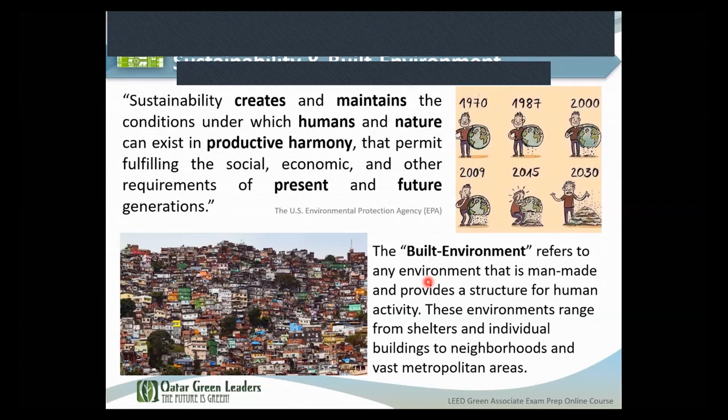The built environment is one of the components of human activities, because as humans we need shelters, offices, entertainment areas, and so on. So whatever we do to practice our human activities, we call it the built environment in general, which includes different types of buildings and facilities. Usually when we talk about sustainability, we talk about built environment in order to be clear.

So what is sustainability? According to the UN definition, coined in 1987 as part of the World Commission on Environment and Development, it is defined as meeting the needs of the present without compromising the ability of future generations to meet their own needs. This is trying to say let us be careful with our resources, let us do our human activities and businesses in a way that is optimized and efficient, and that will allow future generations to have some of these resources. We cannot just continue to deplete resources without considering the generations to come.

Also, the UN Environmental Program defined sustainability in 1991 as improving the quality of human life while living within the carrying capacity of supporting ecosystems. Our ecosystem as humans is considered the planet Earth and its atmosphere. So we need to improve our quality of life through economic or human activities, but we need to take care, because we have limited resources on the planet and need to be more efficient in using them.

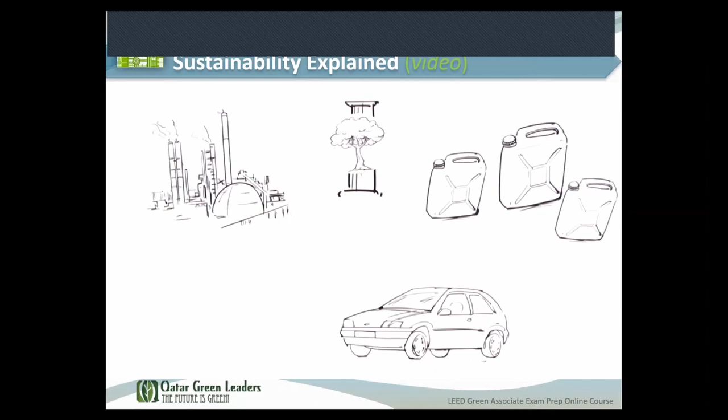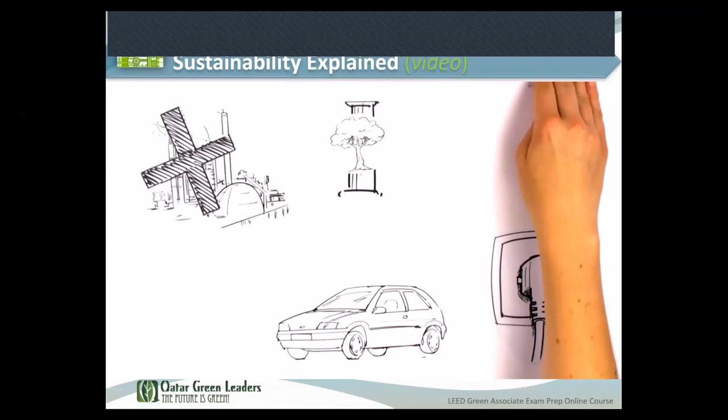We must use natural resources more sparingly too. One of them is petrol, which we need for our cars. But sooner or later this resource will be exhausted, so there'll be no fuel for the cars. This is why we're looking very hard for an environmentally friendly alternative, so that future generations will have environmentally friendly cars. Electric ones, for example.

The next pillar is the economy, that is, business and industry. In future, at the supermarket, Peter should only find produce that's in season in his region, like strawberries in summer. Mangoes from Brazil or bananas from Colombia and Ecuador arrive by air from a very long way away. Transporting them causes a lot of pollution.

The third pillar of sustainability is the social element. Goals here include, for example, better education and training opportunities, equal rights for men and women, fighting poverty, and prosperity for the whole of humanity.

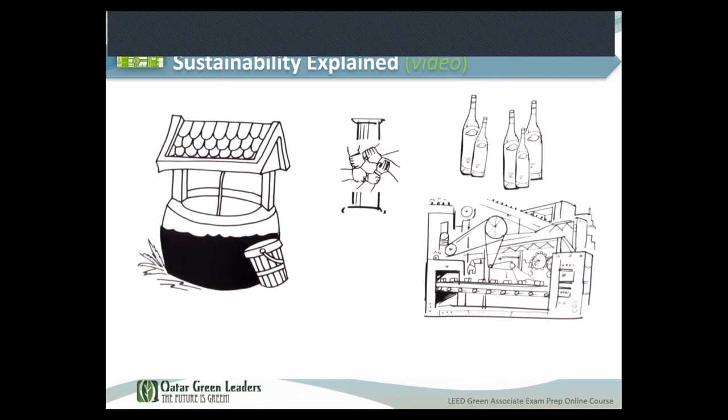One beverage manufacturer from an industrialized country has quite a bit of catching up to do here. It repeatedly takes over the wells of villages in India because it needs the water to make its products there. That isn't very sustainable. Peter doesn't think so either. After all, at least a little water should be left in the wells for the Indian population.

So Peter tries to do justice to the three-pillar model. When he buys organically grown produce, when he goes to work on his bike, and by using green power from wind turbines, he really does live sustainably.

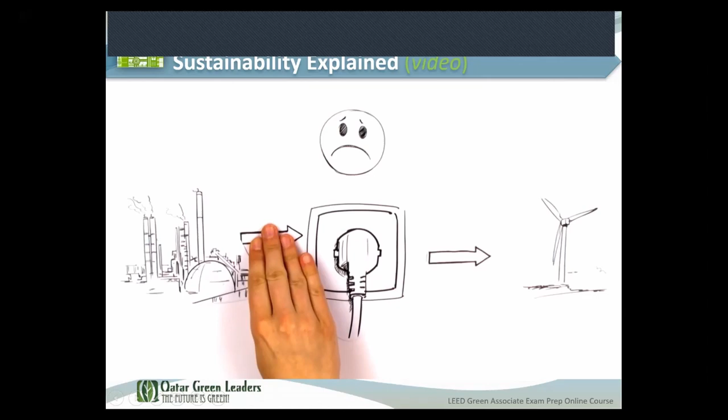But be careful. A lot of companies exploit consumers' environmental awareness. Not all the products that claim to be from fair trade or organic farming are sustainable. It's up to consumers to be well informed about the products they're consuming.

So as you have seen, sustainability can be applied to different facets of life and to different human activities, like, for example, sustainable construction, sustainable industry, sustainable education, sustainable healthcare, sustainable transportation. So it's a very wide term actually.

But what we need to focus on here in this course is sustainability in the built environment, or in short, we call it green building or green construction.

You cannot handle them away from each other. Whatever you do on the social side will impact the economy and will impact the environment at the same time, and vice versa. Like, for example, when you pollute the environment, you are harming society and also impacting the economy of your country.

If you have, for example, a very well managed society, people are healthy and strong, they will help the economy and they will help the environment again. So you cannot separate them from each other. The overlap between these three pillars or concepts will lead you to have sustainability in whatever you are doing, whether it is a project, industry, or any human activity.

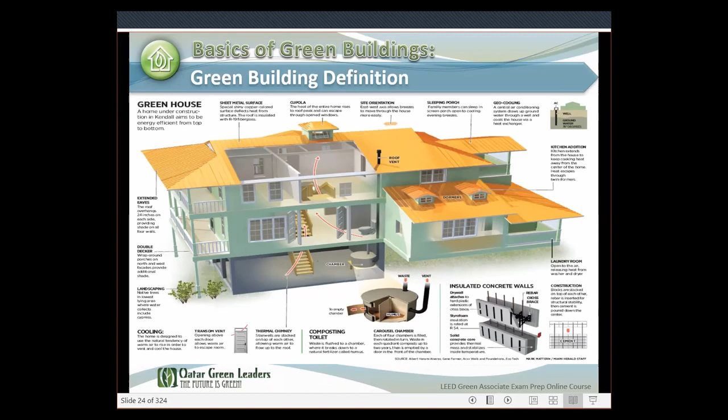Generally, a green building is not about the building itself, but about defining the process, because if you follow the same standard process of buildings, you'll end up with a standard building. But if you need a better product, you have to look into the process itself and try to optimize and adjust it in order to have a better, green building.

So the definition says: it is the integrated effort of transforming the way built environments are designed, constructed, operated, and maintained. Here we cover the whole process from beginning to end, from design until operation and maintenance, encouraging involvement from early planning to beyond the end of a structure's life.

So everybody, all the stakeholders must be engaged in this process in order to guarantee it can achieve its goals, and by result we will get green building or a better building.

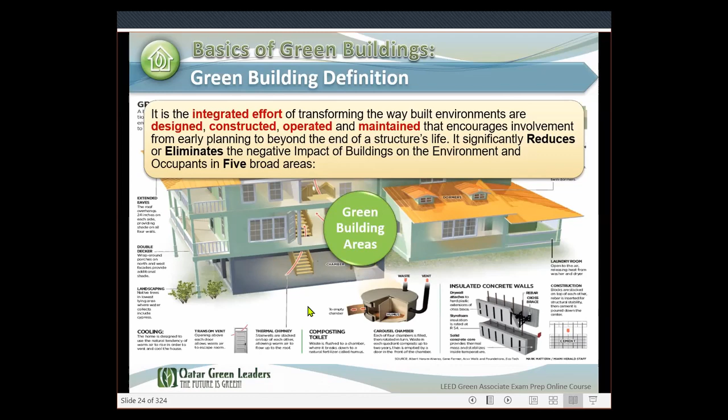The purpose of optimizing the process is to reduce or eliminate the negative impacts of buildings on the environment and the occupants in 5 broad areas. These areas we call them green building areas or green building aspects, which you can find in almost every green building rating system.

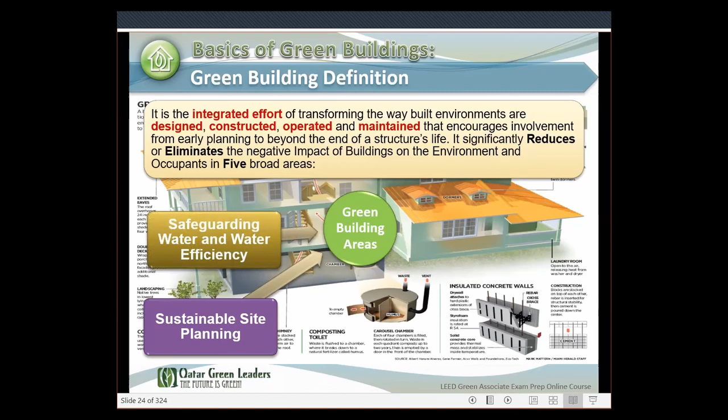These 5 areas include sustainable site planning, safeguarding water and water efficiency, energy efficiency and renewable energy, conservation of materials and resources, and indoor environmental quality.

So if you look into any green building rating system, you will find that these categories or areas or aspects of our built environment are addressed, and this will be converted later in LEED itself into the form of categories. We will have a category called site, energy, water, material, indoor, and the like. So basically, we need to address these areas of the built environment to make sure we cover everything related to green building.

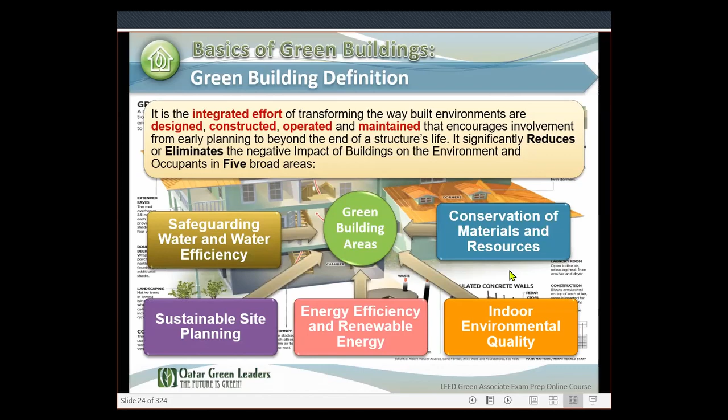Let us now go through some concepts related to green buildings. First concept: green buildings usually are regenerative projects. Regenerative projects are projects that support the health of the local community and regional ecosystem. These projects usually generate energy, and sometimes they can sell the excess to the grid or network.

So you can have, for example, a house or an office building where you generate electricity on your own from renewable sources, and then you suffice your operation. After you have enough electricity, you may have some excess of this energy. You can even sell it to the market or to the grid.

It improves the hydrology system by being more efficient in water consumption and stormwater and rainwater management, for example. Sometimes it produces food, so that's why we can say it is a regenerative project. You may have a house with a backyard or garden where you produce your own food, and you can even sell the excess to the market. It enhances biodiversity, so it has less impact on the environment and ecosystem, and it also provides community network.

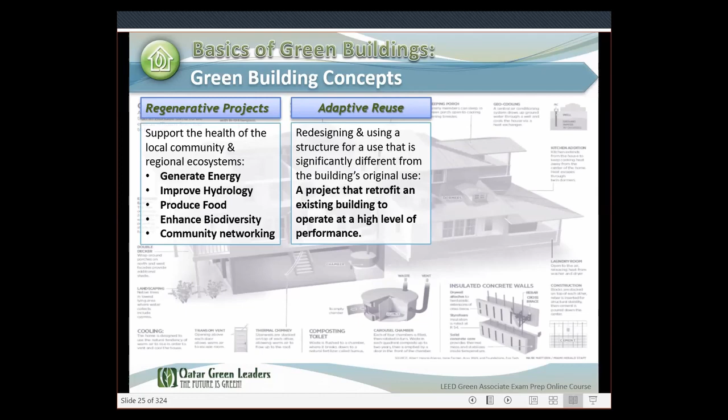Adaptive reuse is another concept of green building, where you redesign and use a structure for a use that is significantly different from the building's original use. So suppose you have an existing building. This building was used as a factory, for example, and then you need to build an office building.

You have 2 options here: whether to seek a new area of land and start building a new office building on it, or to buy this old building if it is not used by anyone else, and just refunction or reutilize this building. You can convert it from a factory into an office building, and this has happened many times in different areas of the world. It is usually even economically viable. You can save money and make better decisions by avoiding developing new land.

Question from Mr. Dawood: is this the concept of Ras Abu Aboud Stadium? Yes, not necessarily Lusail Stadium. Ras Abu Aboud is maybe a clear example of that, but usually when we talk about adaptive reuse, you are using an existing building. In Ras Abu Aboud, there were actually some buildings or facilities existing on site, and they have been included in the master plan of the stadium, so you can consider this adaptive reuse. I am not sure about Lusail Stadium, but I think Lusail doesn't have existing building utilization, maybe. I'm not sure.

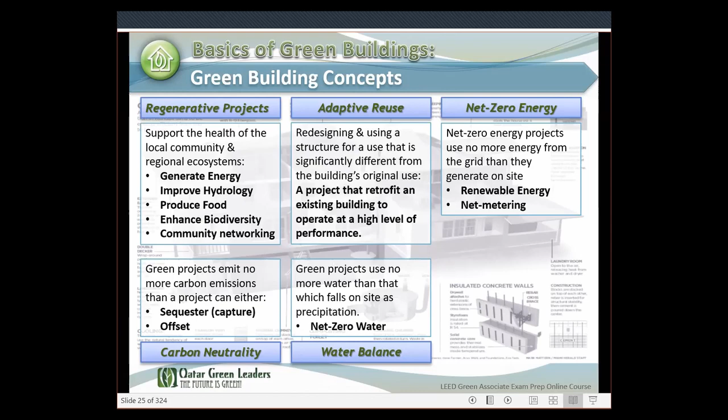Water balance is another concept in green building. Similar to net zero energy, a project is net zero water if it uses no more water than that which falls on site as precipitation. You can also say a green building may be net zero waste, meaning there is no waste at all. The green projects produce zero waste by salvaging, reusing, recycling, or composting all materials used during construction and operation.

These concepts are not mandatory. We need you to understand them because they are relevant to different credits and requirements in LEED and green building in general, but it is not necessary. Not every project will be net zero, and not every project will have zero waste. What we need to understand is that green projects usually perform better in these areas than a standard project when it comes to all of these concepts. Relative to green building is also what we call systems thinking.

Another comment here from Mr. Dawood before we proceed: he's saying net zero is a mandatory requirement in the UK now. I'm not sure about that, but I don't think it is becoming mandatory - it may be some sort of encouragement, encouraging people to become net zero or to approach net zero in generating electricity. He said by 2050 - this is the ultimate goal for most governments. Some people set a goal for 2050, others set different dates, but in general there is a global target of net zero by 2050 in some countries like the UK. Thank you for this comment, Mr. Dawood.

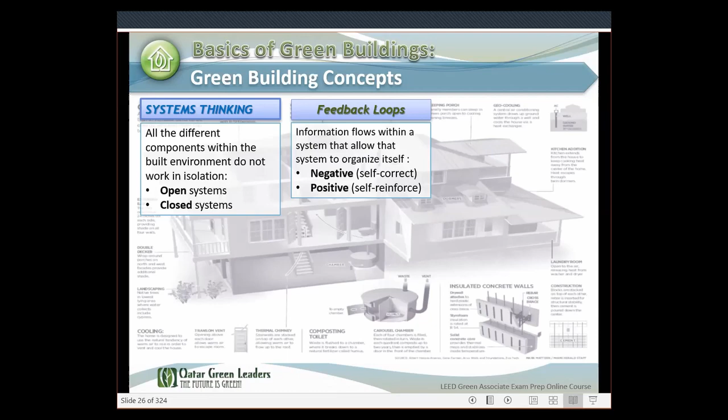That's why we have census surveys done every year, so we know how many people there are, and can make trends or forecasts to see how developments are going. So in general, systems must have feedback loops in order to help them optimize and control. Also, part of feedback loops is having leverage points - places where a small intervention can yield large changes.

For example, if you need to optimize energy consumption in a building, you have two options here. You may change the whole systems of energy inside your building into more efficient buildings, but this might cost you a lot of money.

There is another option, which is to educate your building occupants. This is what we call a leverage point. Instead of taking the hard decision of fixing a problem in the system, we look into some decisions that can help optimize the systems with minimum impact on cost or any other measure.

For example, if you provided information for the building occupants about the real-time energy consumption, and you give some incentives for them to switch off the AC or switch off lighting, you make them aware about the issue, and they will definitely help reduce consumption without any extra investment in the systems itself.

So this is an example of a leverage point that can be used, which is usually referred to as the Prius effect, where people can intervene with the system in order to make it more efficient.

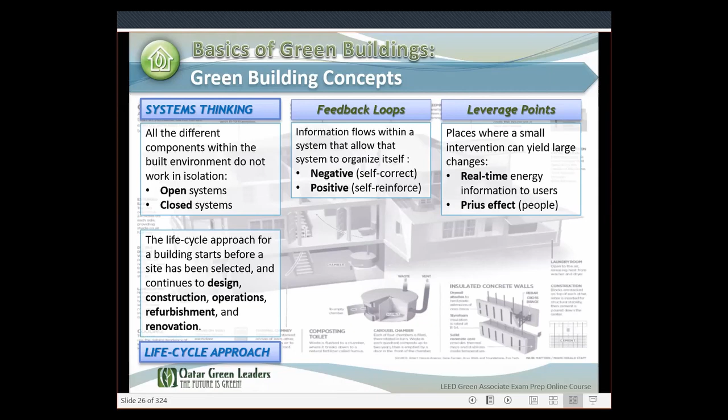You cannot judge any project without having the full picture of its life cycle. This can be handled in a project through two areas or two ideas.

For example, life cycle costing. You can look into the purchase prices, fuel, installation, operation, maintenance, disposal, finance charges, and the replacement cost. All the costs associated with the project can be considered from the day the site was selected until, for example, 10 years or 20 years during operation. This is called the life cycle costing.

The life cycle costing is a principle that will help you realize the benefits of green building. Usually when you invest in a project to optimize its performance, people will tell you green building is costly, it needs more money compared to a standard building. But this is not the whole story, because you are looking only at the initial cost of the project, and initial cost cannot judge the full performance.

You can invest a certain amount of money in the project today in order to enhance its performance, but this amount of money will be paid back to you through operation time. For example, after 5 or 7 years, you will pay back the amount you have invested in the form of cost savings coming from energy, water, waste, or any other performing aspect.

Under the life cycle costing, we consider several types of cost, like hard cost, which is any cost invested in elements of the project, like concrete, steel, flooring, finishes, furniture. All these are considered hard cost.

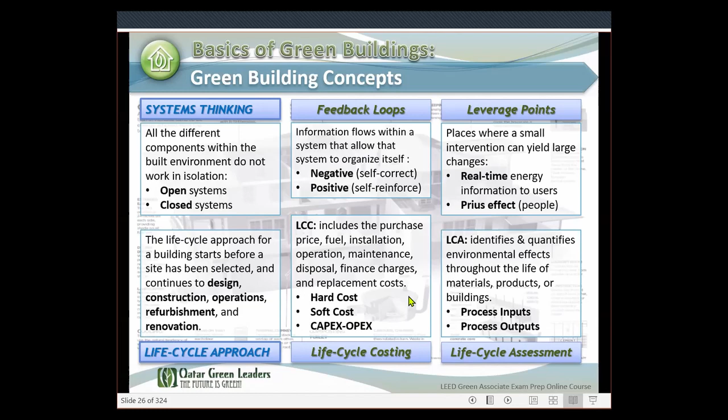To do life cycle assessment, you have to look into the process within a certain range, and you have to define this range - for example, from raw material extraction until selling in the market, or until a number of years during operation. So it depends on the scope of the life cycle assessment. You will determine the time range of the study, and then you can get some inputs from the process, and using certain tools or software, it can help you identify the process outputs, which give an indication of how this product or material is impacting the environment. We will come to these concepts in more detail when we talk about the material category.

So why build green? The business case for green is based on the benefits that can be accrued from building green. There are many benefits, according to the USGBC: energy use reduction from 24% to 50%, reduction in CO2 emissions from 33% to 39%, water use reduction of almost 40%, and solid waste reduction of almost 70%. Green buildings can help reduce several impacts and components of building operation and maintenance, and it is good for the environment. It is part of achieving sustainability goals.

There are also some advantages. If you have a green building, you can utilize it to benefit and gain some advantages compared to traditional buildings. The General Service Administration, or GSA, is the administration in the US responsible for developing, operating, and maintaining governmental buildings. They have a large stock of buildings - some certified as green buildings, some not certified, or traditional buildings.

They conducted a study and published it, and from the conclusion, they found that when comparing green buildings to traditional buildings, green buildings require 13% lower maintenance cost, which helps - if you have more green buildings, you get better budget or economic performance. They also found 26% lower energy usage, due to improved system parameters, and 27% higher building user satisfaction - employees working in these buildings are happier, more productive, and healthier compared to those in traditional buildings. Finally, the carbon footprint of these buildings improved by 33% compared to standard buildings, meaning lower CO2 emissions.

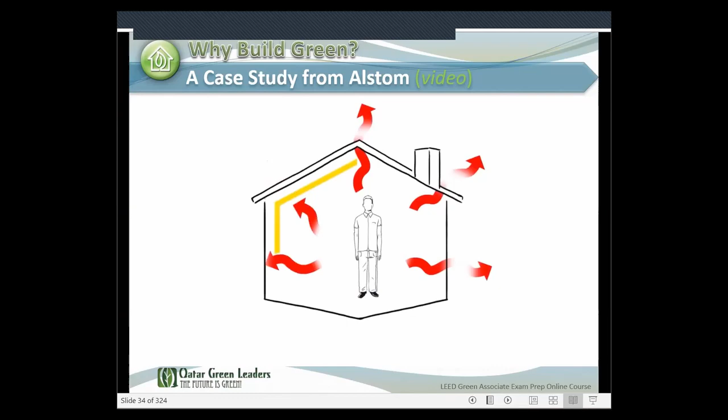We also became aware of how important it is to insulate buildings to avoid wasting energy. This is true of industrial sites too, in terms of pollutant emissions, noise, and uncontrolled energy use. So when we build residential buildings, office buildings, and industrial sites, we need to preserve both the environment and the well-being of their occupants. Since that time, architects have been drawing on the principles of sustainability when they design and construct buildings.

It was in the late 1960s that sustainable building was born. Given these circumstances, how can manufacturers ensure that their facilities worldwide are eco-designed to operate efficiently and effectively? It's a sizable challenge. The goal is to reduce the ecological footprint of industrial buildings, both as they are being built and throughout their lifespan, while ensuring that their occupants have the best possible working conditions.

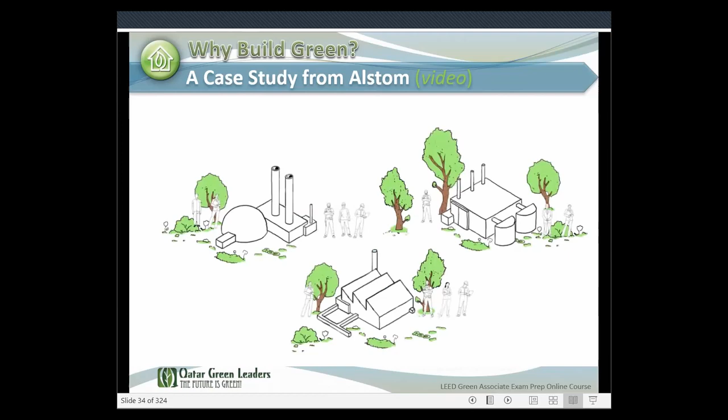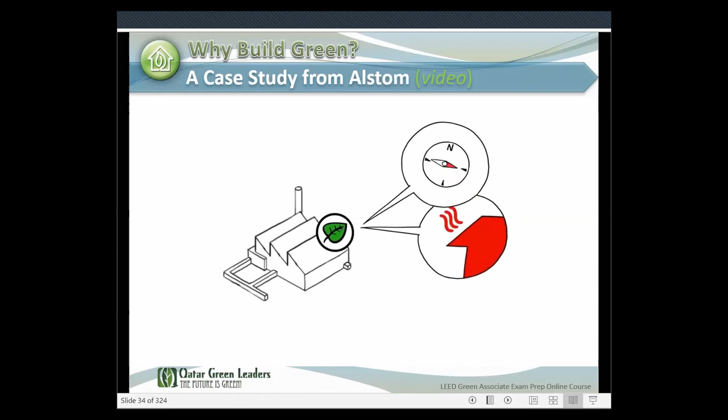To do that, architects consider several sustainable building criteria. A green building is energy efficient thanks to its level of insulation, the direction it faces, its use of renewable energy, its heating and air conditioning systems, and its positive energy balance.

Buildings are also eco-friendly if they reduce water consumption and recycle their wastewater, if they optimize the quality of their sound insulation, and if they are accessible via public transport.

And obviously, green buildings use materials and equipment that are friendly to people and the environment. So they'll make greater use of local suppliers, and they'll include materials such as wood that generate smaller amounts of carbon dioxide as they are produced.

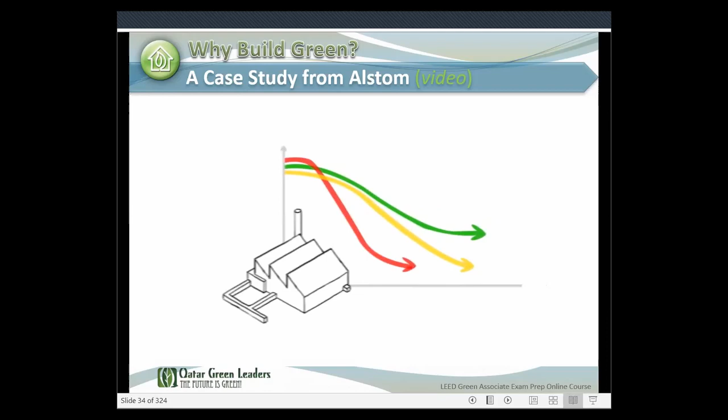There's no doubt that eco-friendly buildings, and industrial sites in particular, require a bigger investment at the outset, but because they consume less energy, the operating, maintenance, and upkeep costs are reduced over time. Since these facilities are more comfortable and more efficient, thanks to improved ergonomics, they allow for better use of the workspace. There are several certification bodies that monitor compliance with these criteria.

LEED certification from the US emphasizes the environmental issues posed by eco-construction, while France's HQE certification is more concerned with the comfort of those using the building, and the UK's BREEAM considers both these criteria equally.

By constructing eco-friendly buildings, companies play a major role in promoting sustainable development within the economy. With Alstom, commitment to green construction can be seen in the eco-friendly buildings the group continues to design, several of which have obtained one or more of these certifications, and in the steps it's taking to evaluate the performance of its existing sites. In addition, the group's new sites are all eco-friendly, and several are even pilot sites.

Every new group site needs to address two major issues. How can we comply more closely with international standards? How can we create a more standardized building process worldwide?

For instance, take the new Chattanooga plant that opened in the United States in June 2010. It won gold certification under the LEED program for building energy efficiency because energy consumption was reduced by 35%. Today, skylights provide 75% of the lighting in the site's occupied areas.

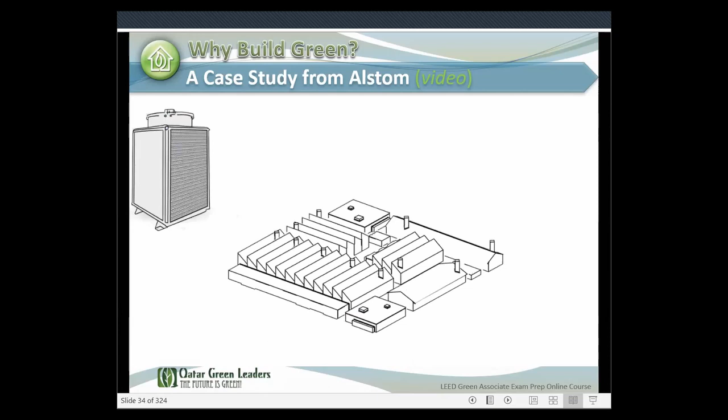They have the very latest electrical devices for monitoring energy-intensive equipment, such as dimmers and motion detectors, to reduce the use of lighting. Thanks to high-efficiency heat pumps and a double-flow CMV system, the site captures 80% of the heat it generates.

Photovoltaic panels with annual capacity of nearly 800 megawatt hours have also been installed at the site, enough to provide electricity to 100 homes. And there's a special parking area designed to encourage car sharing among employees.

As a result, the site has cut its energy costs by 25% and its consumption of natural gas by 60%, while employees enjoy more efficient and more pleasant working conditions.

Alstom is already operating several sustainably built plants, and their number is growing. They include Camaçari in Brazil, Newcastle, Amarillo, and Charleroi in the United States, Wuhan, Tianjin and Shanghai in China, Chennai in India, and Ufa in Russia, plus in France the plants in Massy, Belfort, Saint-Ouen, and soon Villeurbanne and Montpellier.

Around the world, these changes are helping Alstom improve employee working conditions and make each site more environmentally efficient and more productive. With Alstom, eco-construction is making sustainable development a key factor in keeping the group competitive.

So as you have seen, this is just summarizing the benefits of green building, which has been adopted by this giant group of companies.